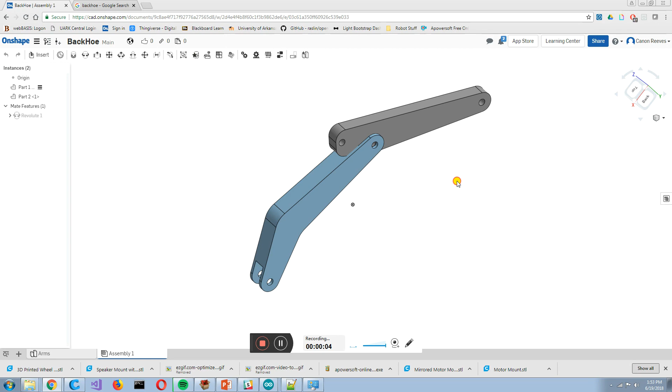Alright, so now we have our first two arms done. There's some collision things, but we'll deal with that in a little bit. Now what we need to do is design a base so that we can rotate this entire thing. The base can be a little bit interesting, so we're gonna do what we can here. I'll try to be pretty concise.

I'm gonna create another part studio, and I'm gonna rename this one base. And I'll move this out of the way.

So if you look at our backhoe, the base can do quite a bit, right? There's like these tank treads, and then this whole base rotates right here. What I'm going to suggest we do is make this a little bit simpler. So instead of doing this rotating thing, we'll just do one tank tread base, and then we will focus on just that arm joint. So to do that, let's go ahead and lay out what this base looks like.

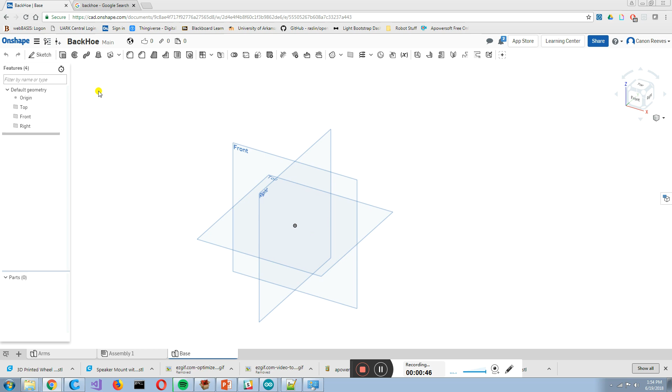And when I design a frame for a robot or something, I like to look at the top and then pull it up. So for the top of this, let's just go ahead and start with a rectangle. And then we'll do another rectangle within that.

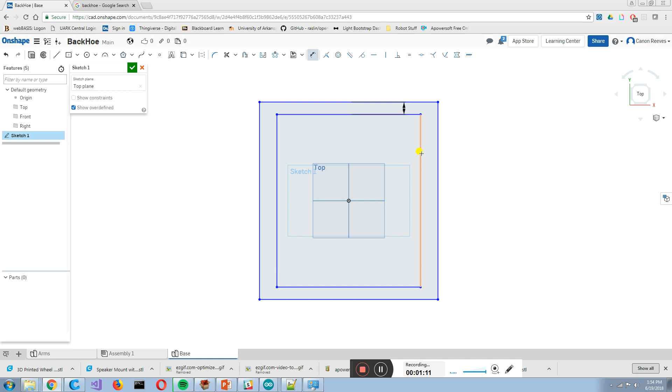And then we want to create some kind of size standardization between the two. So we're going to say that this entire frame is 1 inch, and the distance between here and here is also 1 inch. So now I can drag this around, but those two lines stay the same distance from each other.

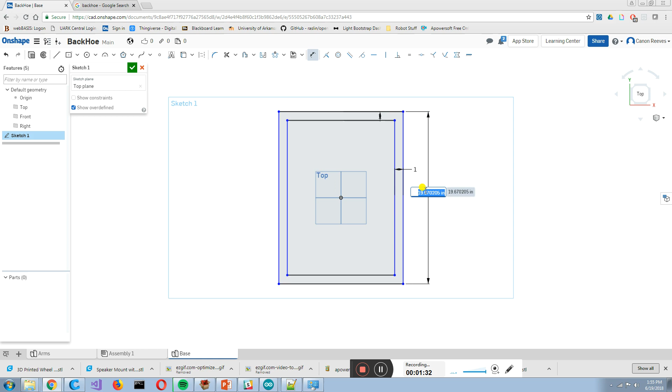So if we look at this, it looks kind of like a rectangle. If we remember, our arms are 24 inches long, 18 inches long. So let's make this one 36 inches long, and we'll make it—oh, I clicked the wrong one.

So if you notice, that's the inside. That's not exactly what I wanted. I'll click dimension again, click on the outside. I'm going to make that 24. I think that's a pretty good ratio.

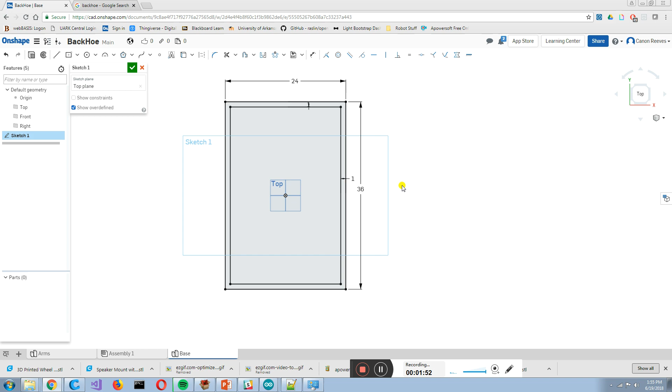Now, in theory, we could make this our frame. It's just this one big rectangle, but in practice, it wouldn't be that strong of a structure. And the reason is, well, there's this big gaping hole right here. What you want to do is add some kind of structural support in the middle.

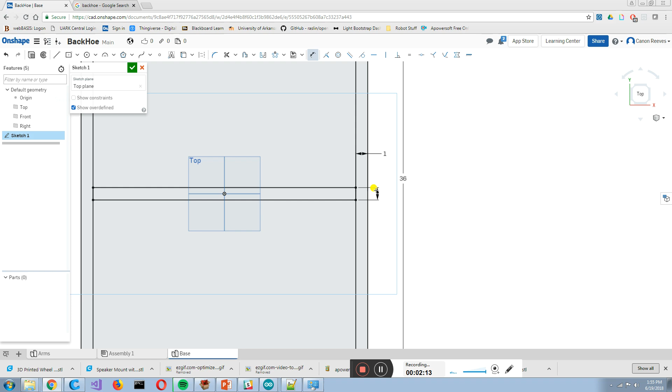So what we can do is click on rectangle again, and we can come over and say that this dimension right here is 1 inch. It's standardized. And then what I'm going to do next is focus on making half of this really structurally sound, and then we'll mirror it across this line.

So to make this one sound, let's do this. Let's do L, then Q, and I'm going to click on this line, go all the way to this line, go to the center points—and you'll see why I'm doing it in a second.

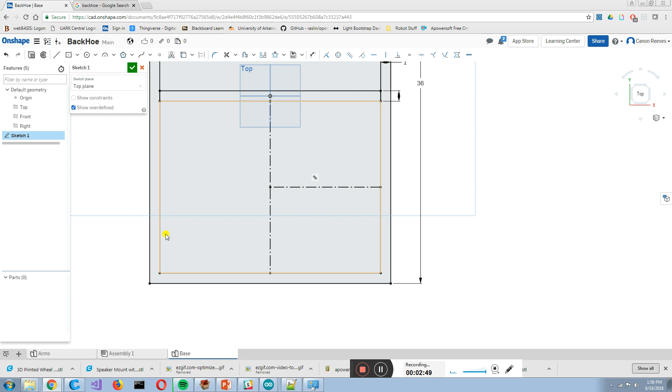So now I'm going to click on line, construction again. I'm going to go to the center point of this line and draw a line across. So what this will allow me to do is kind of center and just focus on this one side right here. So let's do this, let's click on this, click there.

Actually, I lied. Let's go ahead and make a rectangle in here for the supports. So we'll click it right against there. I'm going to click on that line, click on this line, and say that they're equal to each other. So now it's the same size.

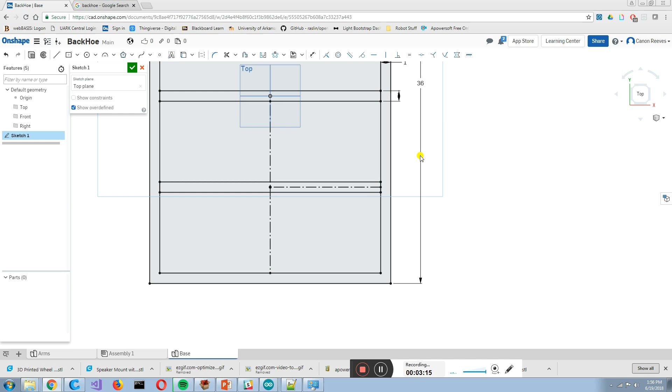And now what I'm going to do is do some kind of triangle things, because the triangle is one of the strongest shapes, which is pretty cool, I think. I'll click on these two lines, and actually, you know what, we'll just go ahead and skip that for now.

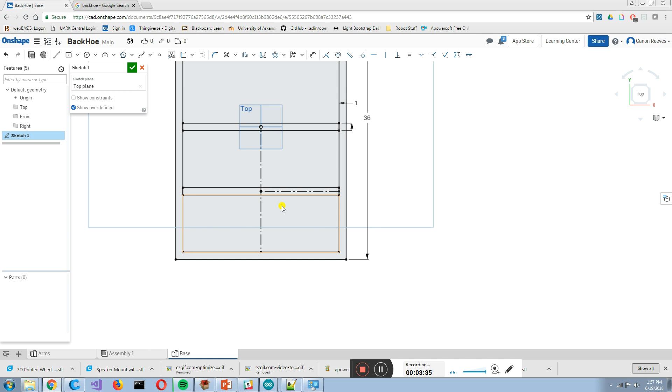And what we'll add is a rectangle from here to here. I'm going to click on this line, click on this line, and say they're equal to each other. It didn't like that, I'll try it again. That's why—so whenever it doesn't let you click it, what you can do is drag from the right to the left, and that will select anything inside it. So it's selecting a number of things, and I don't know if this is actually going to work.

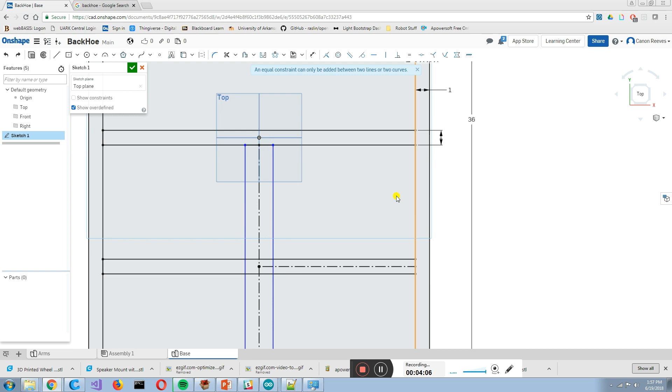That did not work. I'll just go ahead and click on dimension, click on these two lines, and call it 1 inch. Sometimes you win, sometimes you lose.

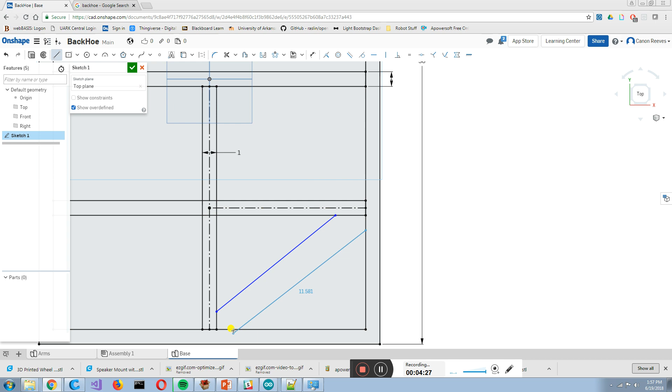Now we can finally do our lines. I'm going to click on this one, then this one, click escape, then click on this line and this line, and click escape. Then I'm going to make a construction line from this one to this one. Then I'll click on our construction line, click on that line, and make it a right angle, perpendicular. I'll do the same for this one, which means these two are parallel.

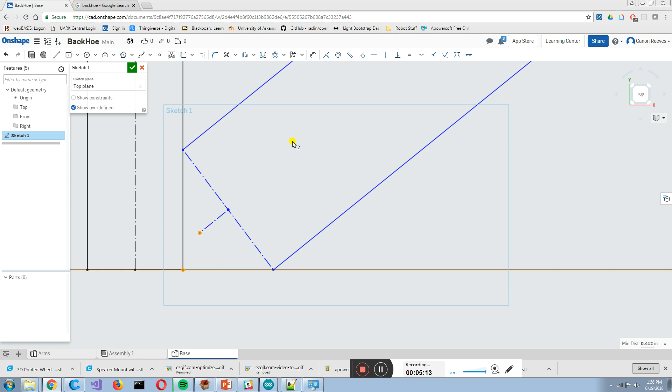Now I want to click on point, go to the center point of this, click on line, then Q, click there, and we'll just make it random. I'm going to click on my line and this line and make it perpendicular. Then I'll click on that line and this point and click coincident. And that messed everything up.

So I'm going to undo that. Before I do that, I'm going to put a dimension between these two and call that 1 inch. That'll make sense in a second while I'm doing this.

Now I'm going to click on that point and this point and hit coincident, and it won't mess up. What you notice is this is a 90-degree angle to there. It's kind of up to you to decide if that's what you want, and in hindsight, I don't think that's what I want.

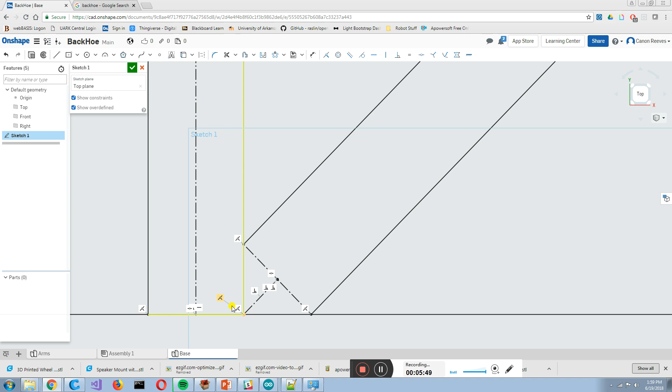So what I'm going to do is click on Show Constraints, click on our coincident point right here. Sometimes you have to drag to see them. Click on that one and click Delete. So now I can move wherever.

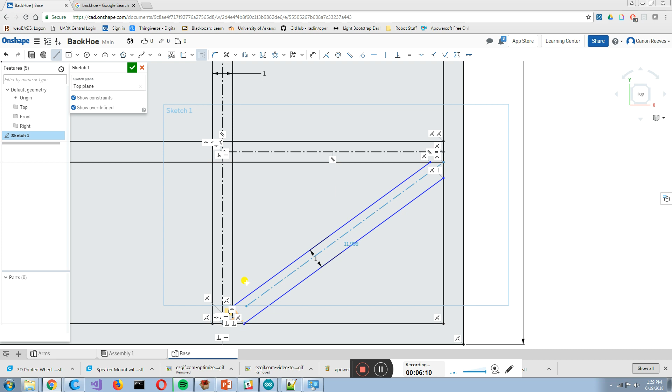Now what I've decided is that I want it to be even between right there and right there. So if I drew a line from here to here, and I hit all my constraints, I would want this line right there to be parallel with this line. Once I do that, that should be pretty even in terms of structural support.

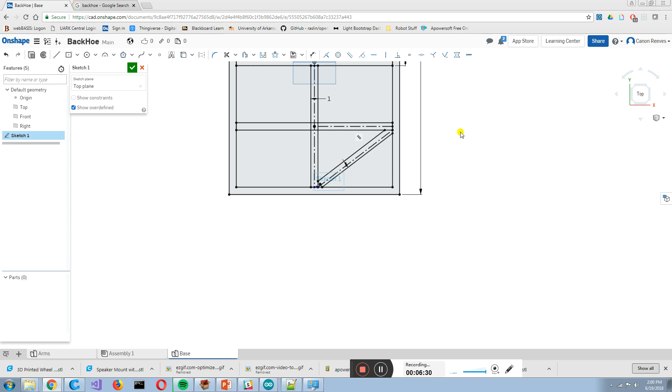That was a ton of work, and we wouldn't want to do that for everything. So now what we're going to use is the mirror tool. I'm going to click on mirror right here, and I want to mirror it across this center line. I clicked on that line, and now I'm going to click on the things I want to mirror, and that'll be these two.

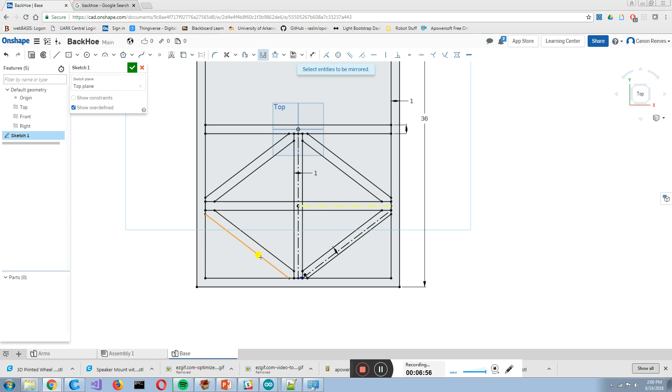Now I'm going to do the same for the other side right here. I'll click on mirror, click on this line, click there, there, then click there, and there. Now what you see is a pretty strong part.

So that's only half, right? And I want the whole half. So I'm going to click on mirror, go to the center plane right here, and then I'll click on all of these lines.

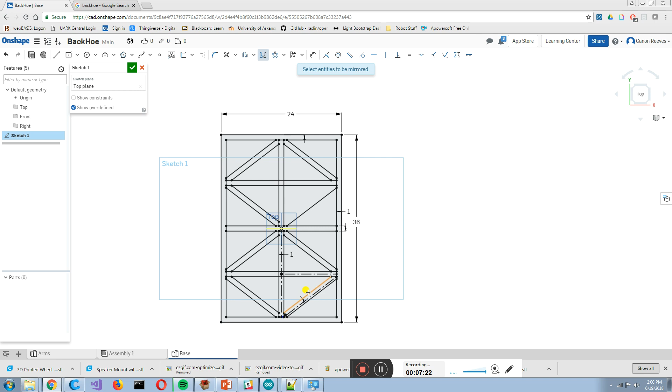And what am I missing? Not that one, not that one, that one. There we go. And now it's symmetric, so I can click the check mark.

I can go over here and click extrude, click on my sketch, and I'll say, oh, so we didn't trim things. So now what we have to do is go and click individually in here what we want extruded with it. That sounds kind of annoying, and that's because it is.

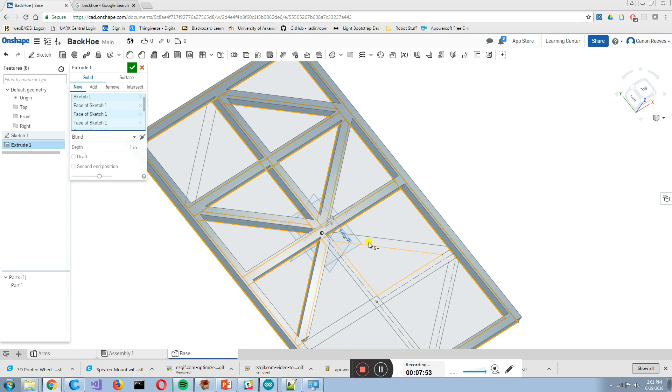Basically what happened is, in theory, this triangle in here could be part of it, or these lines could, so it doesn't know. And when Onshape doesn't know, it's going to choose to go with the safest option, which is to just not do anything there in the middle. But luckily we know, so we can tell it, hey, this is what's important to me, this is what I want you to extrude.

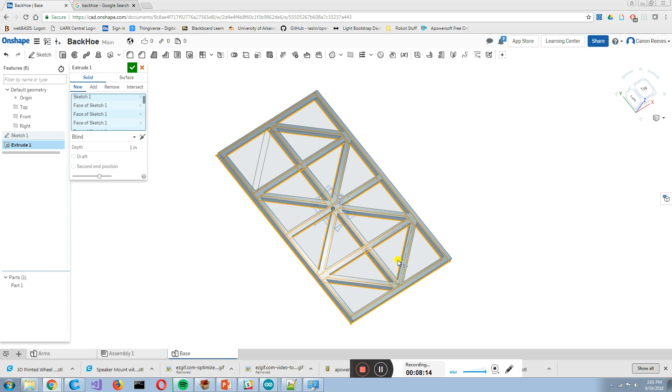So I've got all my faces clicked, and I'm going to make this 3 inches tall, because it's a frame, it's got to be pretty strong. I'm going to click the check mark.

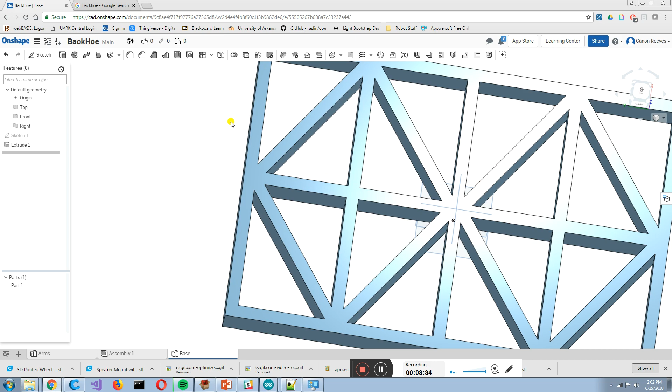So I've got this funky looking frame, and I just need some way to mount, basically mount my arm on it. So what I'm going to do is click sketch, click on the top of it, click the letter N, and come over here. I've decided that this is where I want to mount my arm.

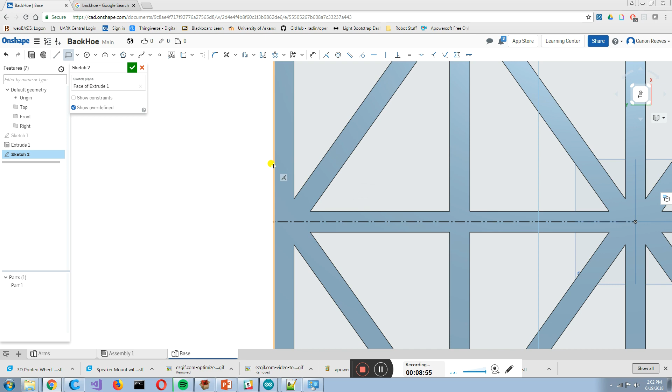So I'm going to click on line, then construction, click on the center point, do it all the way to here, and I'm going to make 2 things. So I'm going to click on corner rectangle, and I want this corner to go from here to here.

And I want this corner to be 1 inch wide, because that's what we've standardized. And now we get to decide how long we want that to be. Now, if you think about it, we have a 1 inch circle kind of in the middle of this.

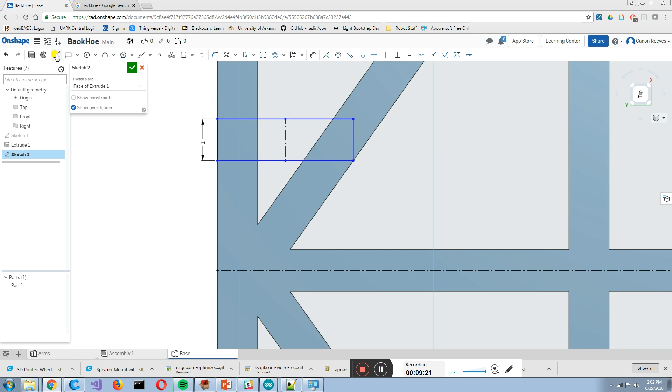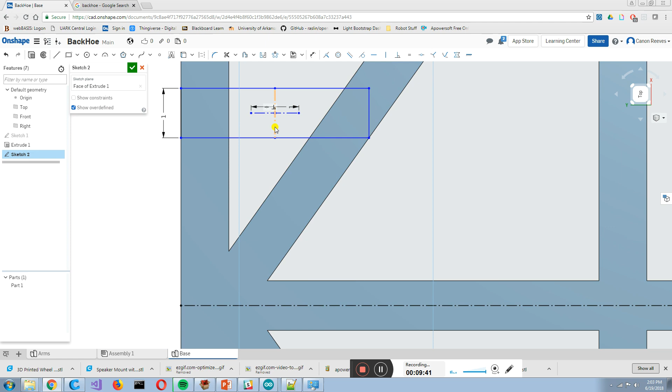So let's draw some things out to make it easier to visualize, so we can figure out how big we want it to be. Put a line in the center, and then on the center of that line I'll draw a line. I'll click on my line at that point, click on center point, and then make this 1 inch long. So that is the size of our circle, right there. That's basically where our pivot will be.

And so let's pick how big we want this to be. If we say 4 inches, that's pretty large. Actually, I went about this the wrong way. I'm going to delete that. Totally forgot. Sorry, guys. What we want to do is mirror across this line.

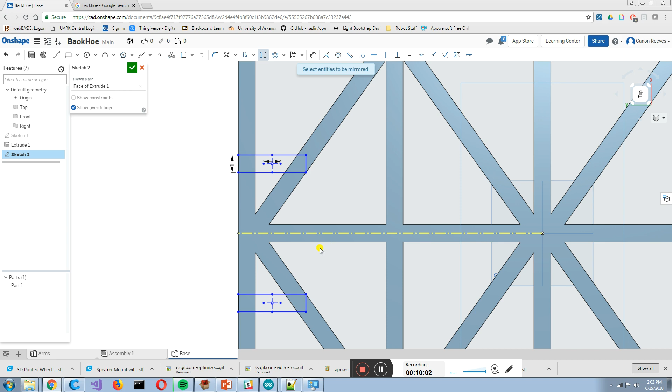Then I'm going to select this right here. Do you remember how our base is 3 inches wide? So that means that from here to here it needs to be at least 3 inches. I'm going to make it exactly 3 inches for simplicity's sake. I'll click on dimension, click on that line, and make that 3 inches. So it'll automatically tell me how big that could be.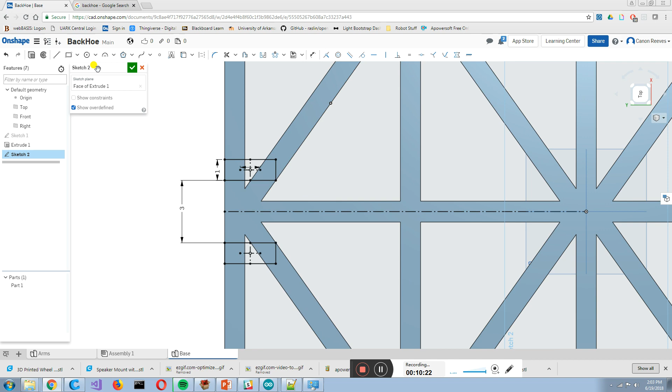Now I'm going to hit the check mark, click on extrude, click on sketch 2, and say I want that to be 3 inches long. So here we have these two 3-inch long blocks, and it's in theory where we're going to pivot from, but we need some things to get where we can pivot there.

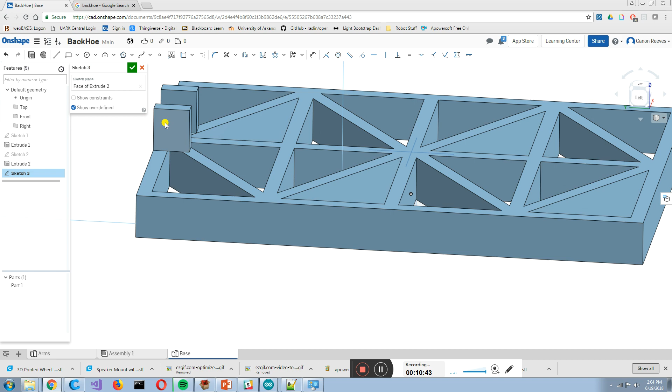I'm going to click on sketch, click on the side of that, click the letter N, and I want to do a circle in the very center of this. So I'm going to go to this line right here, then go all the way down, click on that line, hit escape, click on it again, then go to the center point of this line, and where those two meet is the exact center of this.

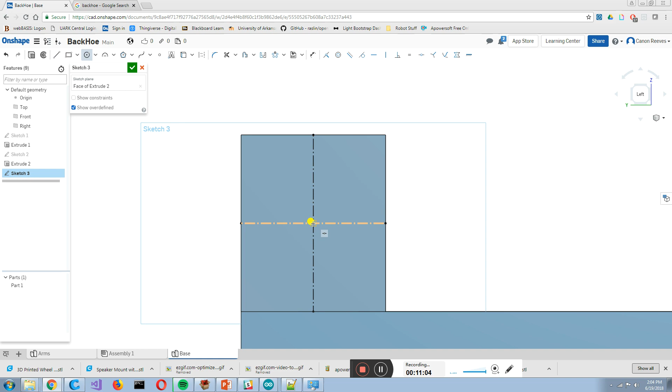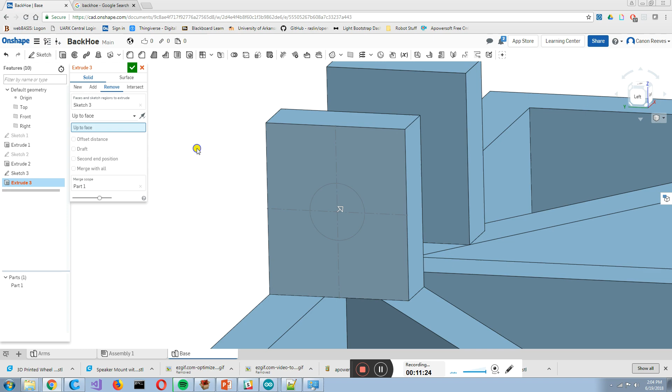So I'm going to click on that, click on dimension, say that's 1 inch, and that's it. Now I'm going to click the check mark, go to remove, extrude, click on remove, click on sketch 3, and say it needs to be up to face. For that face, I'm going to select this face right here. Then I'll click the check mark. And there we have the base of a frame.

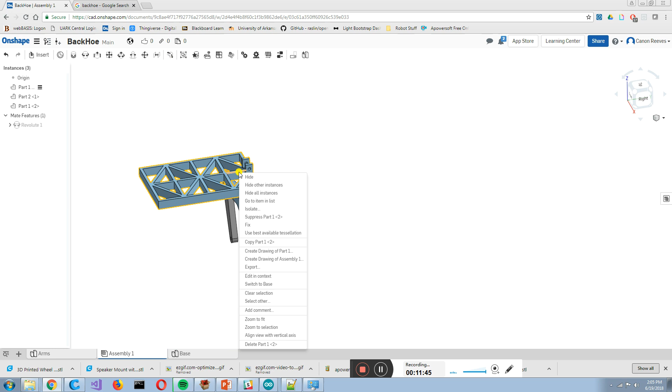So it doesn't have wheels, but it is some kind of frame. I'm going to go to my assembly and insert our base. Looks kind of weird, but that's all right, it's because we're at an angle. So I'm going to fix our base, and then go to this part and unfix it.

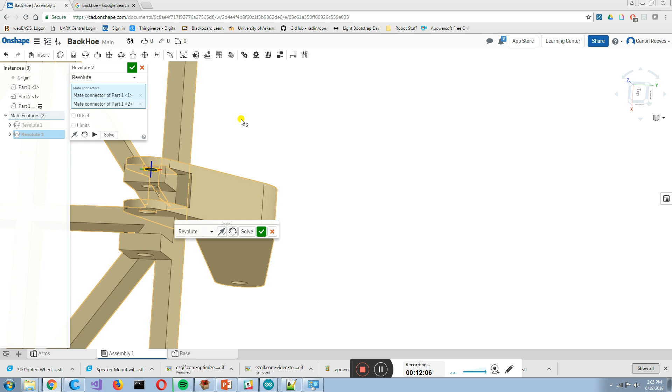Then what I want to do is create a revolute mate between that inner circle right there and this circle right here. So if you notice it looks weird, what do we do? Well, we hit this button, and that flips it. And that's still weird, because I picked the wrong circle. So I'm going to go ahead and escape.

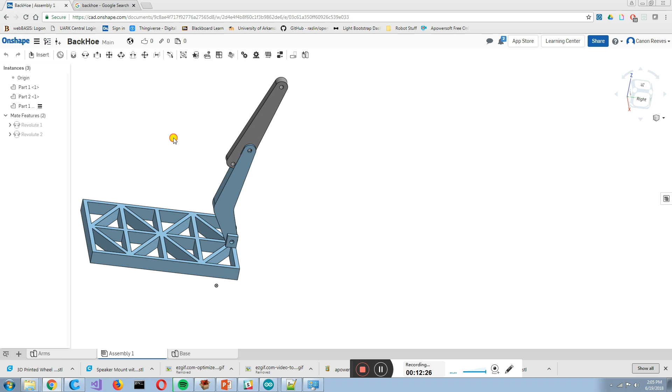Happens sometimes. I'm going to click revolute. I'll click this inside circle, which is the one we want, and this outside circle. It looks weird, so I'll hit this button, and it looks better. So there we go, this is kind of flipped, that's all right, that happens. But now what you see is I can move this whole thing. And so that's the arm of our backhoe.

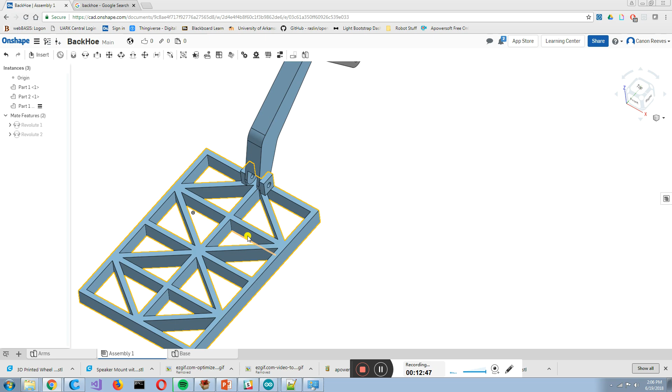Now, a couple of notes as you're designing this. The inside of this doesn't have to be perfect, and it doesn't have to be what I made. It could be your own structure. I just drew this because I liked it, and I thought that would be a good fit. It's your design, you can choose what you want to do with it. So that inside is one of those things that doesn't really matter as much. In reality, this could have been a solid rectangle. That's totally okay, that's up to you when you design it.

Anyways, so there's the first base iteration of our backhoe.